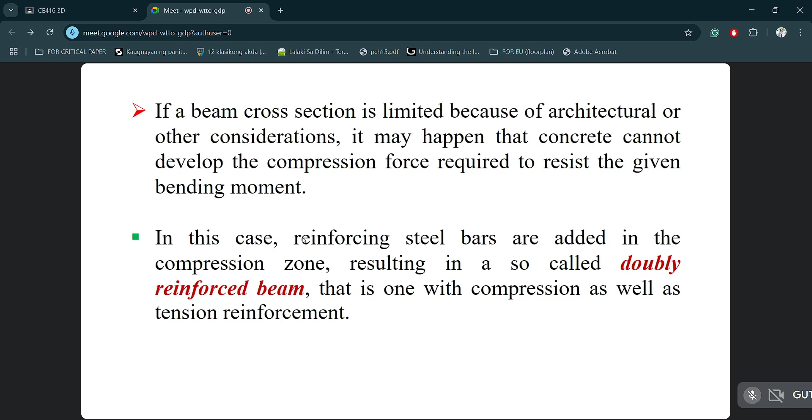The difference between the two is that when singly reinforced, we just consider the tensile reinforcement, while when doubly reinforced, since the compression developed along the beam is not enough to carry the capacity, we add additional reinforcement along the compression side. So now there are two reinforcements to consider: the compression side and the tensile reinforcement.

Another reason for placing reinforcement in the compression zone is that when a beam spans more than two supports in continuous construction, both positive and negative moments will exist as shown in the figure, meaning we still have to put additional reinforcement along the compression zone.

Take note, we have what we call reversal of force, or RF, which happens especially under certain conditions. Reversal of force means...

this shear moment diagram can be reversed, meaning it flips, especially if we have a lateral force that hits our structural elements, induced by seismic force or wind load.

If we consider only the dead load and live load, the shear moment diagram of our beam is mostly based on our structural theory analysis. But if there is a lateral force involved, there is a tendency for reversal of force, wherein the positive moment becomes negative, and the negative becomes positive.

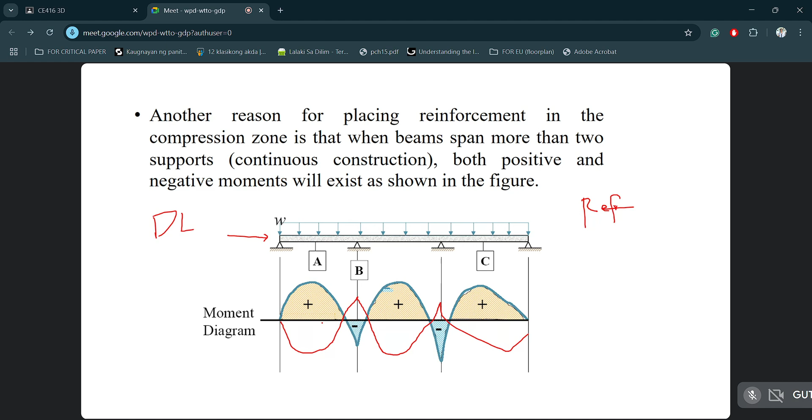It has been found that the inclusion of some compression steel has the following advantages. Number one, it will reduce the long-term deflection of the members since we have additional reinforcement along our section, strengthening the beam.

It strengthens our beams and helps reduce deflection. It will also set a minimum limit on bending loading, and acts as a support for stirrup bars continuing throughout the beam span. This means our compression reinforcement is actually necessary even if the beam is singly reinforced for moment, we still need to put compression reinforcement.

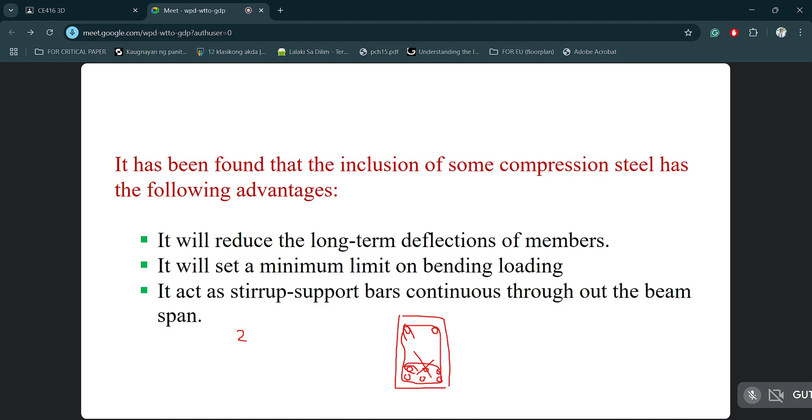So the stirrups should really enclose the compression reinforcement as well, which has a minimum of 2 pieces. In the analysis, the total resisting moment of the beam is assumed to consist of two parts, or two internal couples.

The first couple is the part due to the resistance of the compressive concrete and the tensile steel reinforcement, which is defined by the singly reinforced concept. In our singly reinforced concept, we just consider the tensile strength provided by our tensile reinforcement, denoted by T, and the compression force, which is the equivalent compression block of our beam, defined by C, equal to 0.85 f'c times A times B.

When it becomes doubly reinforced, we have an additional couple moment, which is the part due to the compressive steel developed by the steel reinforcement along the compression zone, plus the additional tensile strength of the steel.

This is what happens when our beam is singly reinforced - the only consideration is the compressive force C provided by the concrete, and the tensile strength provided by our steel.

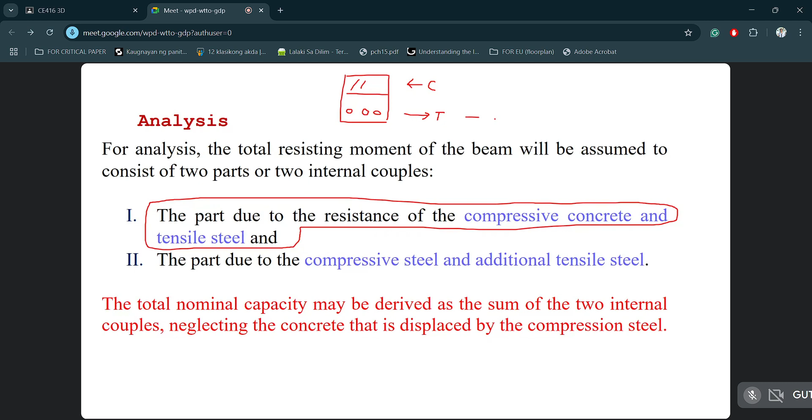When it's doubly reinforced, notice that the steel reinforcement along the tensile zone is increased. So we have additional tensile reinforcement, plus additional reinforcement along the compression zone, giving us an additional compression force provided by the steel reinforcement.

So now we have two couples which produce our moment capacity. The total nominal capacity may be derived as the sum of the two internal couples, neglecting the concrete that is displaced by the compression zone reinforcement.

Take note that for our compression zone, we consider it as a whole area - we are not going to consider the concrete displaced by our additional reinforcement along the compression zone. This is to make it simple, because the diameter of the compression reinforcement would depend on the necessary requirement, and considering the displaced concrete would complicate the analysis. So to simplify, we consider the whole section as the compression provided by the concrete, and we don't account for concrete displaced by the compression reinforcement.

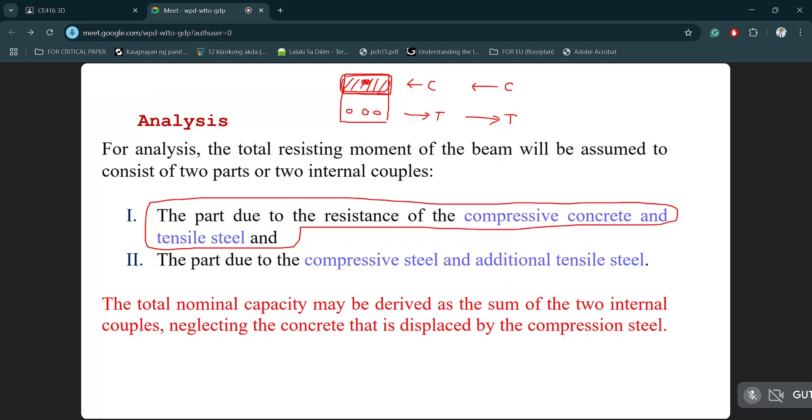In other words, if the compression reinforcement has more than 2 layers, then you need to first define the centroid of that particular reinforcement, just like what we did in our singly reinforced beams.

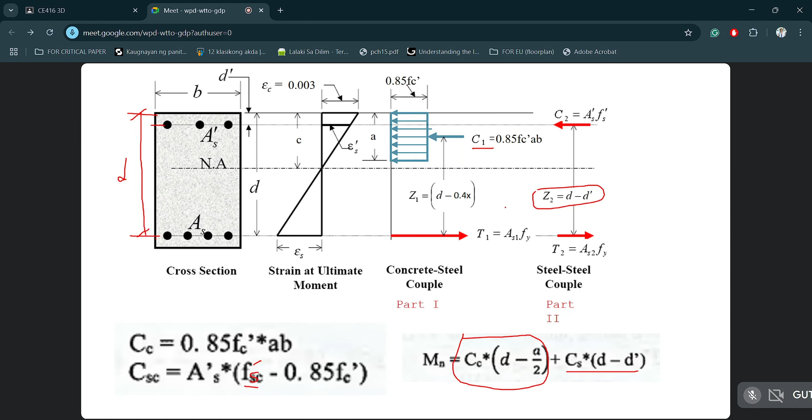So this is the additional moment arm of our additional compression force provided by the compression reinforcement. Meaning the analysis is the same: the strain diagram and the force diagram are the same, only that we need to add additional capacity in terms of the additional compression reinforcement.

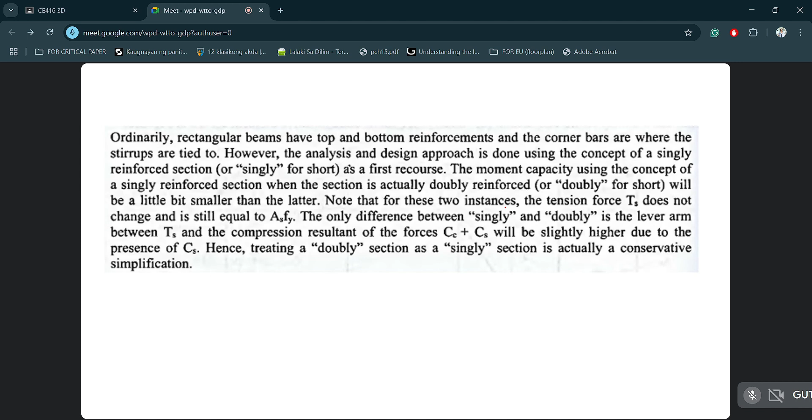Ordinarily, rectangular beams have top and bottom reinforcement, and the corner bars are where the stirrups are tied to. So if we have the beam here, this is the compression zone, and this is the tensile zone. So mostly our stirrups will be hooked along the corner reinforcement.

However, the analysis and design approach is done using the concept of a singly reinforced section as a first recourse. The moment capacity using the concept of a singly reinforced section, when the section is actually doubly reinforced, will be a little bit smaller than the latter. Note that for these two instances, the tension force does not change and is still equal to As Fy.

The only difference between the singly and doubly reinforced cases is the lever arm between the tension force and the compression resultant of the forces C sub C and C sub S, or C1 and C2. It will be slightly higher due to the presence of C sub S, the additional force from the additional compression reinforcement. So doubly reinforced beams will have a higher capacity compared to singly reinforced beams. Hence, treating a doubly reinforced section as a singly reinforced section is actually a conservative simplification.

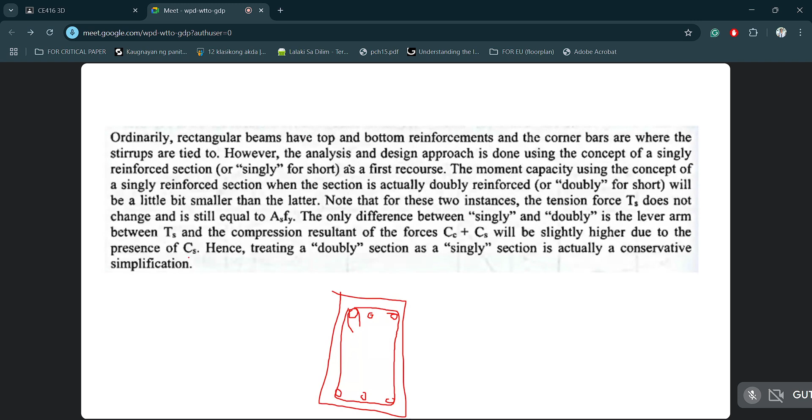So let's talk now about the maximum steel ratio. Take note, it hasn't changed, our maximum steel ratio in terms of singly reinforced beams, which is equal to 0.85 FC prime beta 1 over Fy, times 3/7.

This remains our basis if we are going to design our beam based on singly reinforced or doubly reinforced. If our steel ratio is greater than our rho max, we design it as a doubly reinforced beam. Even for doubly reinforced beams, the same rho max is still used as the basis of our analysis. But the actual maximum steel ratio of a doubly reinforced beam will change because we have additional reinforcement in the compression zone. Still, we use this as the basis for analyzing either singly or doubly reinforced beams.

We recall that to ensure the beam sections will be ductile, the minimum steel strain as per NSCP is 0.004. This is our general provision, that the strain of our steel should be 0.004 to ensure that our section is a tension-controlled section and behaves as a ductile structure.

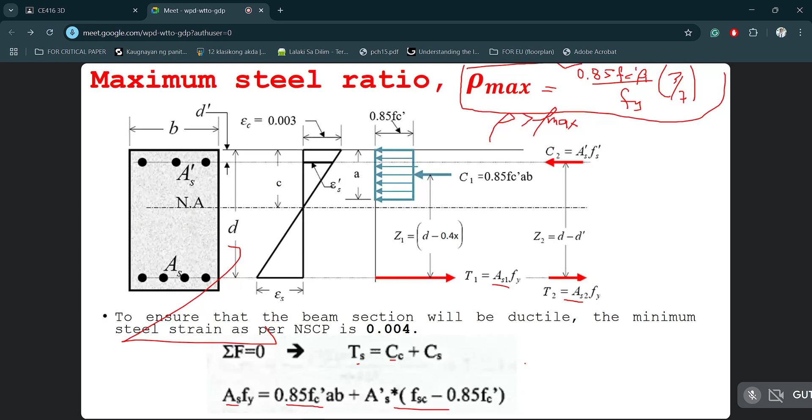This is the compression force provided by the concrete, and this is the compression force provided by our steel reinforcement. If we divide by BD Fy, the first term's Fy cancels out, leaving As over BD.

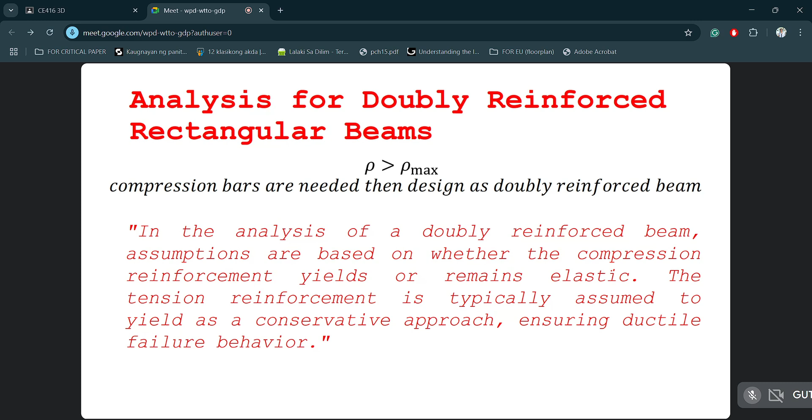Okay, now what formula do we need? If you consider the strain diagram of the beam, we have this relationship - the actual strain of our compression reinforcement, we can derive it based on this particular figure.

So this figure, this part here marked in red - if we take the ratio or the slope of this, that becomes our slope here. This part or this distance is 0.003, minus the strain of our compression reinforcement.

The depth of this is d prime, or the steel covering plus the distance from the top fiber to the centroid of our steel reinforcement - that is d prime. This is also equal to the larger triangle here, which is 0.003 over c. So if we rearrange, with c and d, this is what the scenario becomes.

And then we recall that strain is simply equal to stress over the Young's modulus of elasticity. So this is it. And then if we substitute the value of the Young's modulus of elasticity, we're missing a 0. Wait for a while.

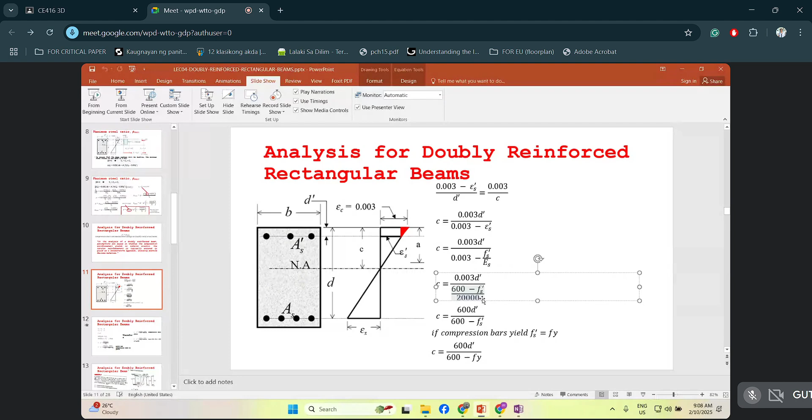Let me correct this one first. Okay, so what happens - multiply this, going to the numerator. So 200,000 times 0.003, that is 600 d prime, all over 600 minus Fs prime.

Now if the compression bars are yielding, the depth of the neutral axis becomes simply 600 d prime over 600 minus Fy. But if not, then we need to solve for the actual strength or stress of our compression bars, or our Fs prime.

And then our As1, the total reinforcement, is simply As minus As prime. And then the steel ratio of the tensile reinforcement will be the actual steel ratio minus the steel ratio of our compression reinforcement. And then if you consider the section as singly reinforced...

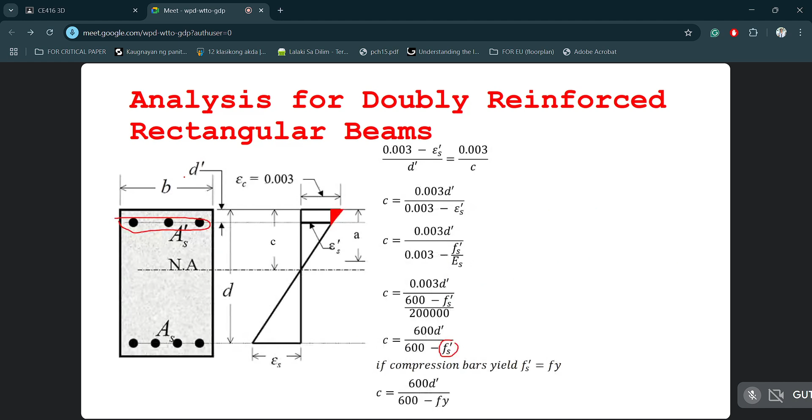So like this - this part here, we are going to omit for now. Omit our compression reinforcement and analyze it as singly reinforced. So if it's singly reinforced, the area of steel reinforcement we use will be the total area of steel reinforcement minus the area of our compression reinforcement.

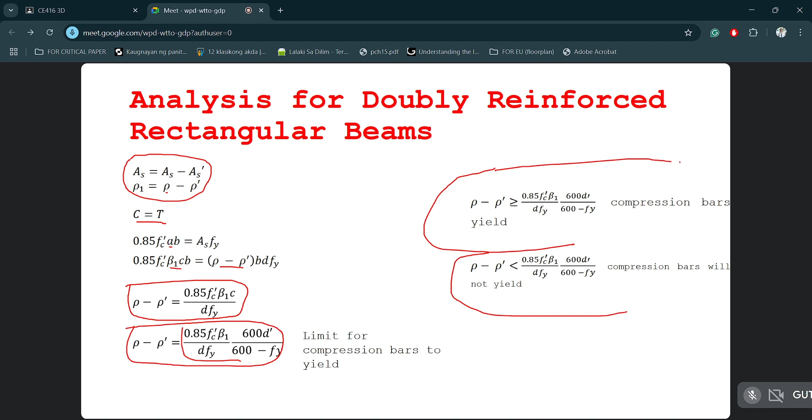So in other words, ito na lang, no? Ito yung maging shortcut na formula to determine whether compression bars is yielding or not. Okay?

Okay, so therefore, if you are going to use it in our sample problem, so this is our problem, no? Ayan, so let's have our first problem. Let me adjust this one first.

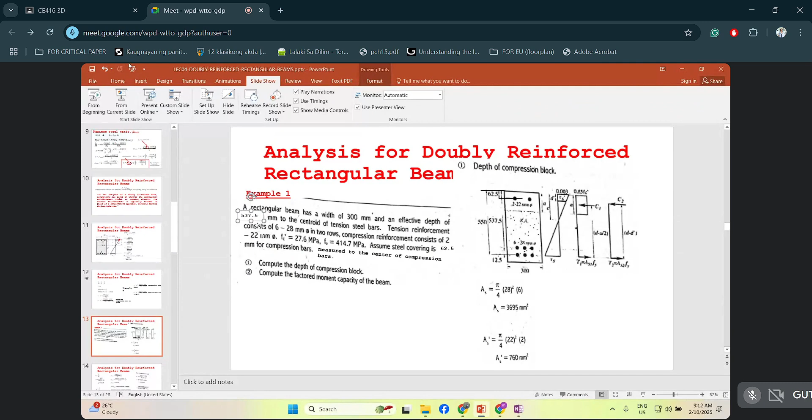Okay, so you'll notice yung ating given question, this is actually extracted from our textbook, pero ako lang ang nag-change gamay then i-clarify ko ang uban kasi yung textbook na to is based on the 2010 na provision ng NSCP, so ako siyang gi-revise to apply the latest version ng code.

So a rectangular beam has a width of 300 mm and an effective depth of 537.5 mm measured to the centroid of the steel reinforcement. So meaning itong effective depth na to is already measured doon sa ating centroid ng ating tensile reinforcement. So the tension reinforcement consists of 6 pieces 28 mm in two rows.

And then the compression reinforcement naman consists of 2 pieces 22 mm diameter bars wherein our compressive strength of the concrete is 27.6. This is less than 28, so meaning yung beta 1 natin dito is magiging 0.85.

Yung Fy naman, yung yield strength ng steel natin is 414.7, and we assume that the steel covering is 62.5. Take note yung steel covering na to is already measured to the center of the compression bars, so meaning ito na yung gagamitin natin as D prime.

And then same pa rin yung magiging concept kapag yung ibibigay sa inyo is clear cover lang ng ating concrete, kasi yung covering natin ng ating beam, yung steel cover ng beam natin is all throughout yan doon sa 4 sections ng beam natin. So meaning kung ano yung steel covering ng tensile reinforcement, same lang din yung magiging steel covering niya for the compression reinforcement. So meaning kapag ibibigay sa iyo is cover lang, same pa din yung magiging D prime mo.

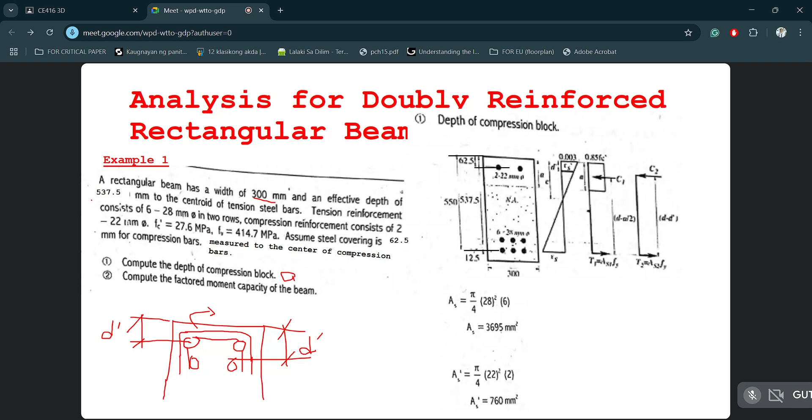So meaning if we are going to define what is the steel ratio, so the steel ratio provided by the steel reinforcement, that will be As 3,695 divided by our B times the effective depth, or 300 yung given natin na width ng beam natin, tsaka yung effective depth naman is 537.5. Kaya meron tayong steel ratio na 0.02

Now, yung steel ratio naman provided ng ating compression reinforcement, same pa rin, no? As over bd pa rin siya. Pero this time, yung ES natin is yung ES prime or yung steel area provided by our compression reinforcement. So, we will have here 0.00471.

So, kapag kukunin natin yung maximum steel ratio based on a single reinforcement na concept, same yung formula, no? 0.85 FC prime beta 1 over Fy 3 over 7, magkakaroon tayo ng maximum steel ratio na 0.0206. Wherein yung provided na steel ratio ng tensile reinforcement natin is greater dun sa ating maximum steel ratio. So that means, no, kapag maximum yung or kapag more than yung ating actual tensile steel ratio ng tensile reinforcement, then we need compression bars.

So that means we are going to design it based on a double reinforced design concept. Alam natin, no, na kapag double reinforced yung ating beam, ito yung maging criteria na kung nag-yield ba yung compression or not.

By the way, no, kapag yung ating actual steel ratio is lesser than sa rho max, then yung procedure na to will become invalid kasi yung mangyari, i-design mo to based on a single reinforced concept. No? But in this case, more than yung ating steel ratio sa maximum, then i-design natin siya as a double reinforced beam. So yung first step natin sa ating pag-design is we need to satisfy this criteria.

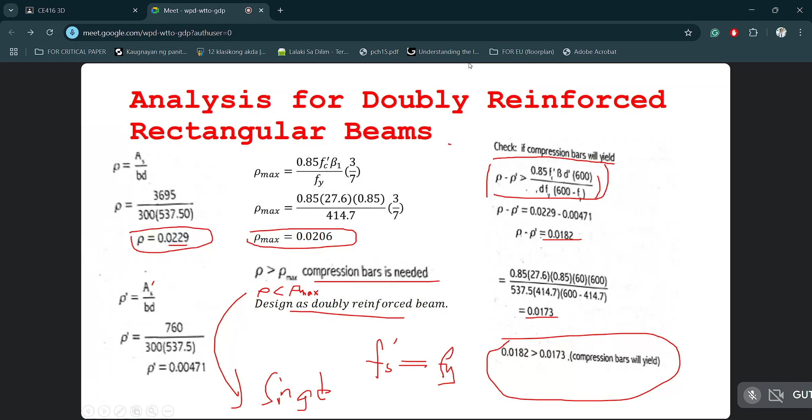By the way, no, you don't need to check whether the compression bars is yield or not, no? Kasi na-check na naman natin based on this particular analysis, no? So in other words, na-satisfy itong, na-satisfy itong equation na to.

Ayan, itong part na to. So we don't need to check, no? Or we don't need to additionally check, no, our if nag-yield ba talaga yung ating compression reinforcement.

But you will notice here na sinolve pa rin natin yung ating depth ng neutral axis natin to simply solve doon sa ating actual na strain ng ating tensile reinforcement, because yung actual strain ng ating tensile reinforcement na to will define what would be the value of our reduction factor. And in this case, yung actual strain is 0.00514, which is greater than 0.005. That means yung reduction factor natin dito will be equal to 0.9.

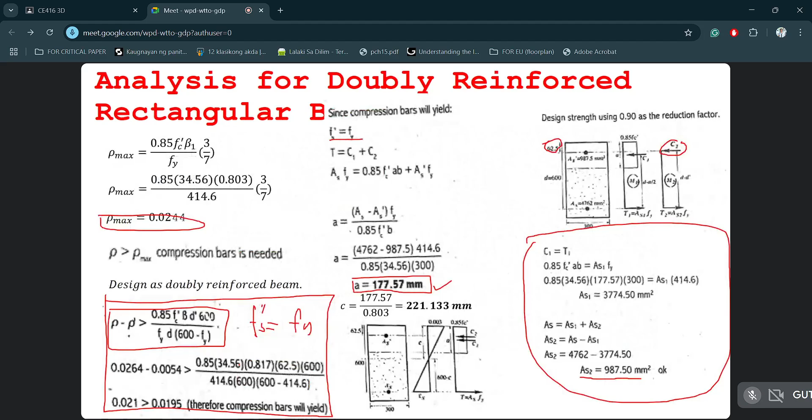Now, yung next requirement is ano yung allowable na concentrated load natin at midspan ng ating beam. So, gagawin lang natin is using the load factor, na 1.2 dead load plus 1.6 live load.

So, instead of adding our load, ang gagamitin natin dito is yung moment, kasi hindi naman natin ma-add yung concentrated load na live load tsaka uniform load na live load. Kaya ang gagawin natin is kukunin natin yung moment ng dead load tsaka moment ng live load para pwede natin i-combine yung dalawa.

Yung maximum moment provided by ating live load, concentrated ito at the midspan, that is PL over 4 or the force times the length over 4. Yung ating uniform load naman na dead load, yung maximum moment na to is WL squared over 8. So ito yung dead load natin, uniform yung dead load, ito naman yung live load which is concentrated at midspan.

Then ito naman yung magiging factor niya, 1.2 sa dead load, 1.6 naman sa live load. So all in all, yung allowable force natin at midspan ng beam natin based on the live load is 337.5 kN. Okay, so ito yung magiging answer natin.

So any question so far?

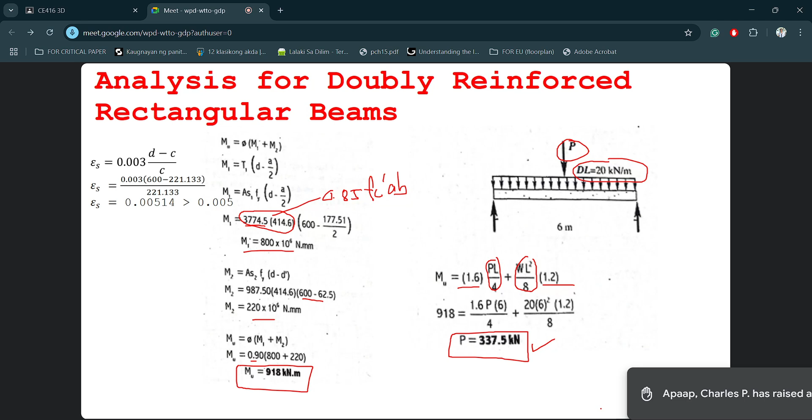Yes, go ahead. Dili na ako ni siya i-minimize kay di ako makita. Go ahead na lang dayon. If you have question.

Good morning, sir. Yes. Wala siya sa solution, sir, but napansin ako sa YouTube, sir, bagay, ay solution na part of solution na ang magamit nila sa pag-solve sa C bagay. Usually, di ba itong ginagamit is 3 over 7, but sa ay solution, sir, nga gagamit sila 3 over 8.

3 over 8? Okay. So yung 3 over 8, yun yung balance, no? Balance condition. So meaning na achieve niya, kumbaga na-achieve niya both the compression, yung compression strain tsaka yung tensile strain. But yung 3 over 8 na yan, yun yung condition wherein parang ganito.

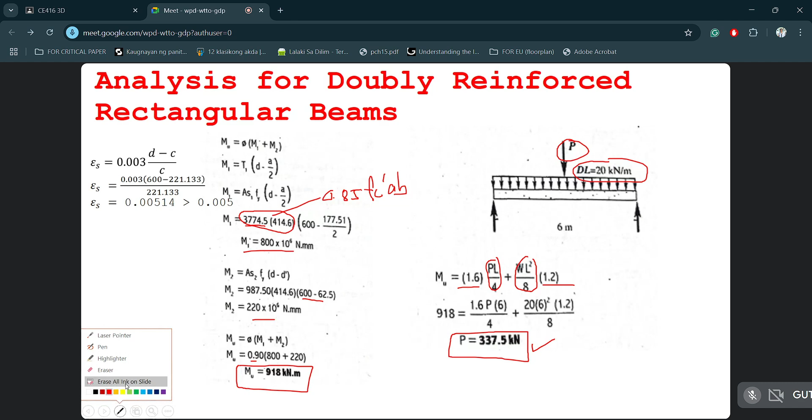Let me explain it in a separate slide. Dito tayo. Okay, 'di ba kung mag-solve ka og actual strain or yung maximum steel ratio, diba? Maximum steel ratio, yung we are talking about maximum steel ratio.

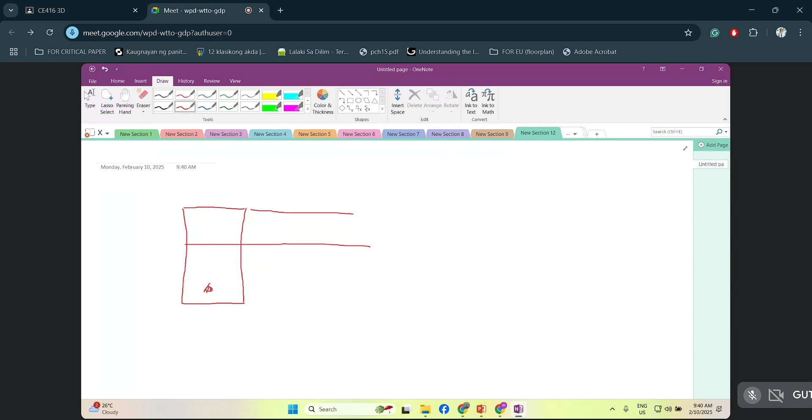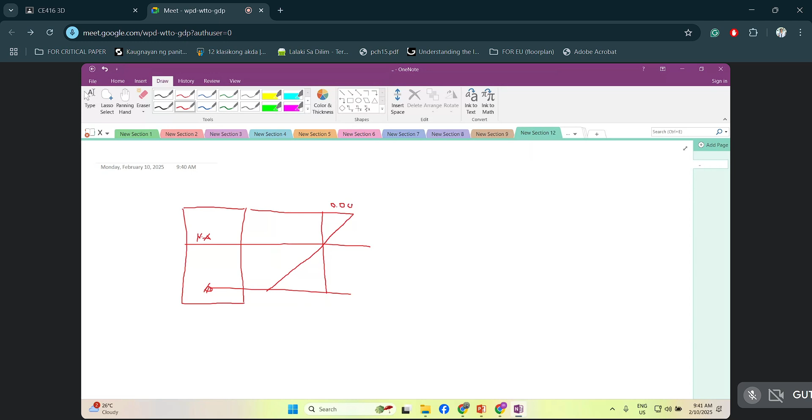So, kung i-draw natin yung ating strain diagram, ito yung neutral axis. And let me put here A, wherein this is the neutral axis. Alright, so mangyari, this is the strain for the concrete, nakuha mo kayo. But anyway, this is the strain of the concrete na meron tayong maximum na 0.003. Ito naman, ito yung actual strain ng ating steel.

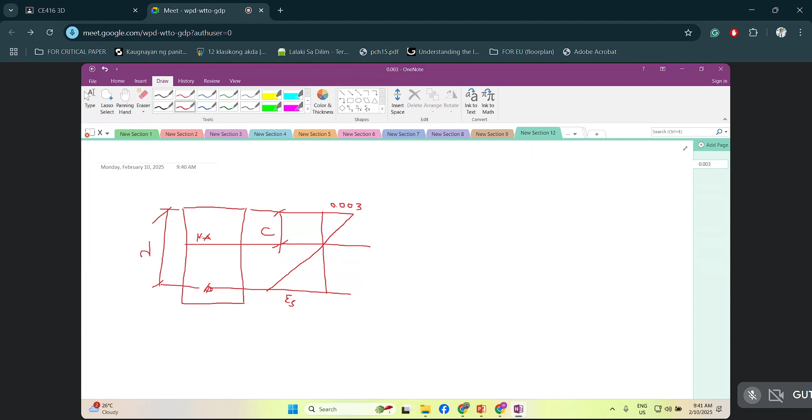No, this is C. Okay, if this is effective depth, right? Kung effective depth to, ang maiiwan dito will be D minus C. Ayan, right? So, kung i-ratio natin to, ang mangyari, that is C.

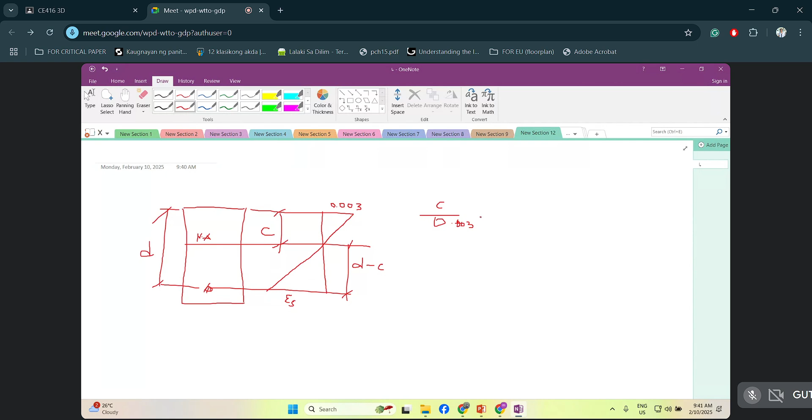Although na-discuss naman ito, pero ato lang i-recall balik, para ato ma-explain further. Or let me put it here siguro. Ito sa boss, C, using this triangle, that is 0.003.

Ito naman is maging ES over, mali, D minus C over ES. Okay, ayan. So, meaning, mangyari, yung C natin is simply, alright, yung C natin magiging 0.003, D minus C over, excuse me for a while.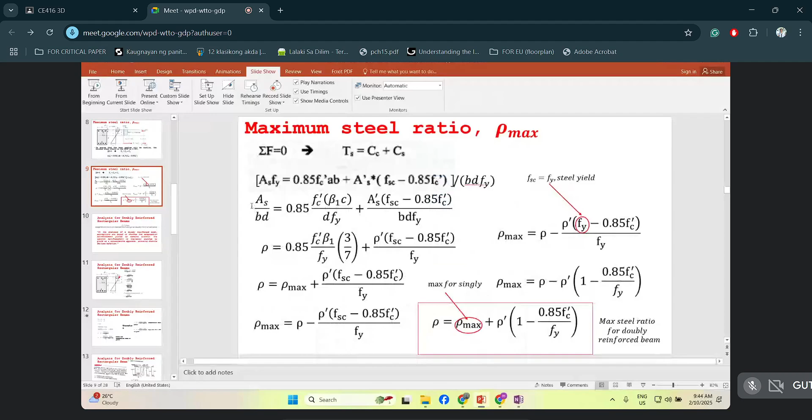To ensure that the beam section will be ductile, the minimum steel strain should be 0.004. So meaning, for it to become ductile or tension controlled, the ES should be 0.004, making it 0.004 plus 0.003. The C over D ratio is 3 over 7.

Okay, got it? That's 3 over 7. Understood? That is 0.003 all over 0.004 plus 0.003, so 3 over 7. Right? Got it? Yes, sir.

Now if we go back to the reduction factor, we are going to use 0.9 when our actual strain is 0.005. So meaning, the code says our minimum or maximum strain should be 0.004 for it to become ductile or tension controlled.

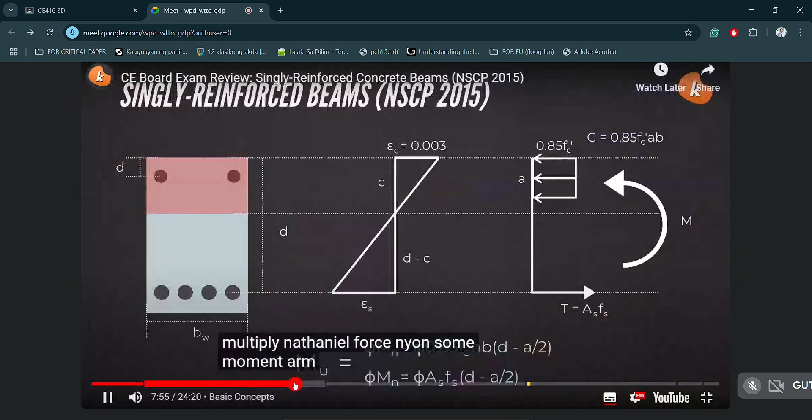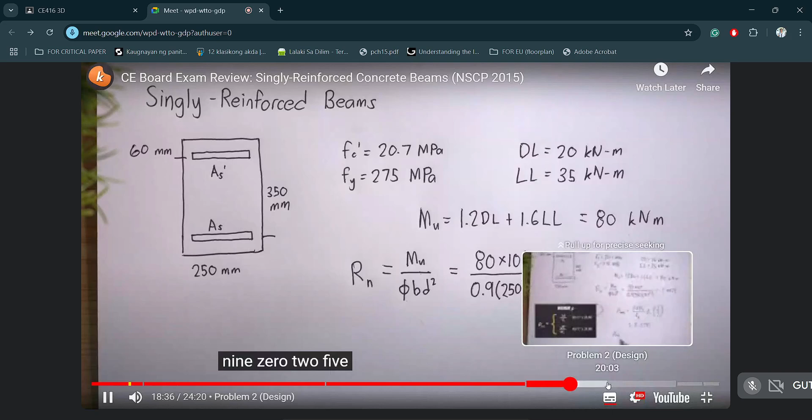This one here is 3 over 7. Over here, I don't think so, but I think I have also seen this one.

I think I've also seen that particular YouTube channel use 3 over 8. But I think there is something in the problem statement saying the solution should be tension controlled, meaning it should be based on the actual strain of 0.005. That's why in that case, the C over D ratio became 3 over 8.

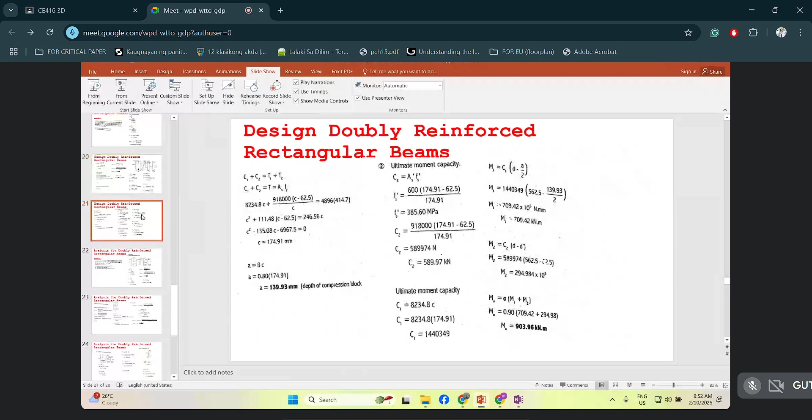A reinforced concrete beam has a width of 350 mm and an effective depth of 562.5 mm. It is reinforced with bottom section steel of 4,896 mm2, which is for the tensile reinforcement. The compression reinforcement, placed 62.5 mm below the extreme compression fibers, has an area of 1,530 mm2. Given f'c equal to 34.6 MPa and fy equal to 414.7 MPa, determine the depth of the compression block and the ultimate moment capacity.

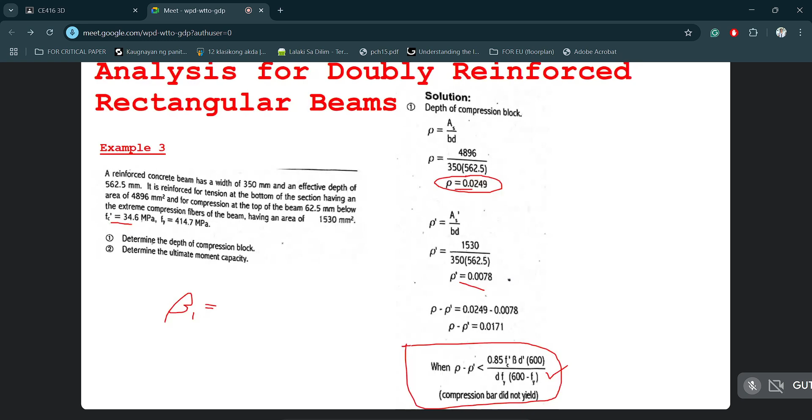So we solved for beta 1 and we already checked that it's not yielding. Using this situation, 0.8 is our beta 1 using the formula, substituting it to our term: 0.85 Fc prime, beta 1, D prime, 600 D minus Fy, 600 minus Fy. You'll notice the answer here is 0.0204. The steel ratio minus steel ratio prime result is only 0.0171, which is lesser than 0.0204. So this means our compression bars do not yield.

So what happens when our compression bars do not yield? This means Fs prime is not equal to Fy. We need to solve for the actual value of Fs prime. It's the same as in singly reinforced beams. We need to combine our strain formula with the force diagram.

We need to solve for the actual strain using ratio and proportion. So Es prime over C minus D prime, this depth, which is the depth of our neutral axis minus D prime, is simply equal to 0.003 over C. So our Es prime will be 0.003 times C minus D prime over C. And we know that Fs prime is simply the strain times the modulus of elasticity, so we get the actual steel strength as 600 times C minus D prime over C, which is...

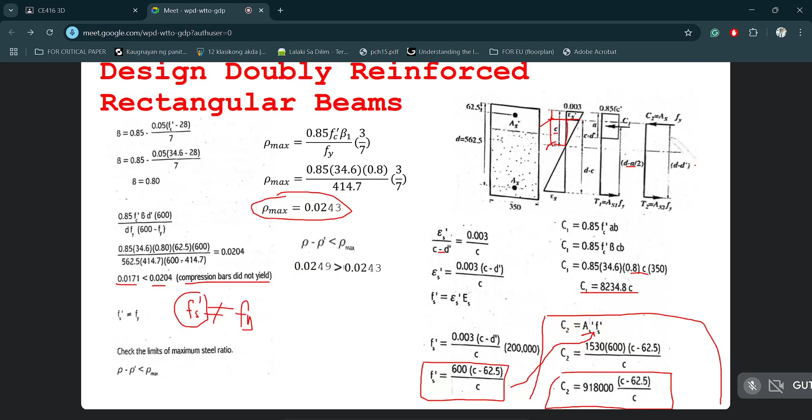And for C1, we already solved it as 8,234.8 times C, multiplying C, we get C1 as 1,440.349 kilonewton. So these two, we just rotate and multiply by our moment diagram, the moment arm of C1 and moment arm of C2. Wherein the moment arm of C1 is the original D minus A over 2, and for C2, the moment arm is D minus D prime.

Meron tayong M1, meron din tayong M2. Add lang natin itong dalawa and we apply the reduction factor na 0.9. Kaya meron tayong 903. Bakit 0.9 yung ating reduction factor?

Kasi yung 0.9 yung reduction factor natin, kasi if we are going to solve for the ES, ang mangyayari, yung ES natin dito is simply Fy, kasi nag-yield yung ating tension reinforcement. So Fy all over ES, this is automatically more than 0.005. So 0.9 yung magiging reduction factor natin dito.

We will have a ultimate moment capacity na 903.96. And so actually ito yung question kanina, kung 0.9 ba yun ang gagamitin permanente sa double reinforced rectangular beam. In most cases 0.9.

Pero meron kasing ibang mga problem na i-stipulate na yung tensile reinforcement does not yield. So mangyari, magsusolve ka talaga ng reduction factor mo. But in this case, hindi naman siya nag-stipulate. That is why conservatively, we assume that the tensile reinforcement is yielding, so mangyari yung ES, yung actual natin na strain ng tensile reinforcement is more than 0.005.

So ayan, yung ultimate moment capacity ng beam natin is 903.96 kilonewton meter. Okay, so I think this is the last problem. Let me check.

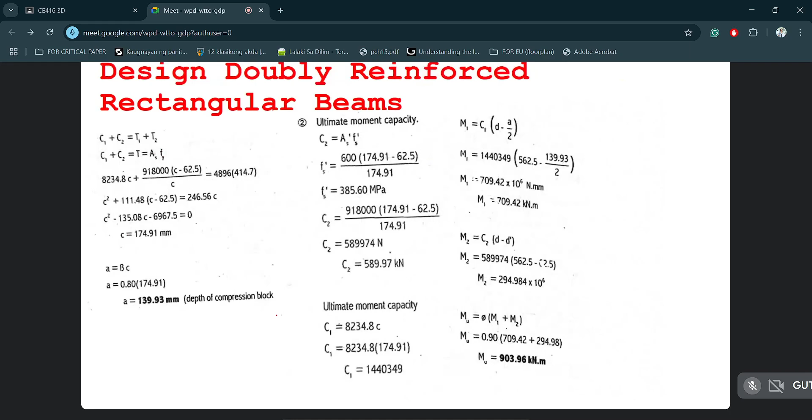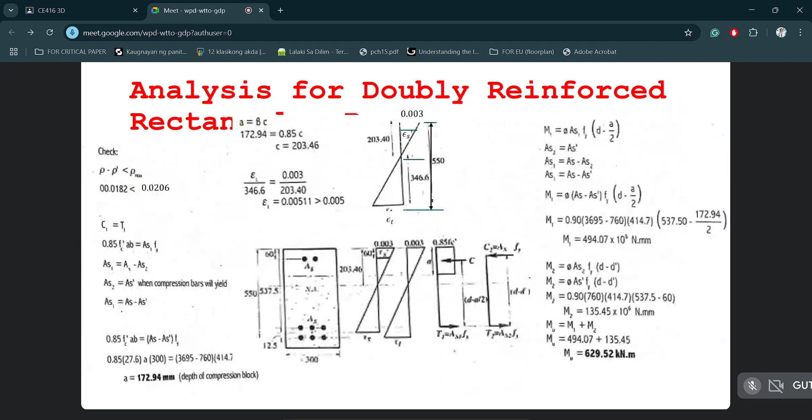Yung formula na gagamitin natin dito is yung kanina. Ayan, ito 'yon, itong formula na to, pero ito magiging Fs. Well, ito ha, ito, ayan, so. Sorry. Lapas. Sample, saan ba yan? Example 4.

Okay, so depth ng compression block. Same pa din yung procedure natin. In this case, yung beta 1 na gagamitin is 0.85, kasi yung FC prime is less than 28 megapascal. So we solve for the actual steel ratios.

By the way, itong maximum steel ratio na to, again, hindi to yung requirement ng ating number 2, kasi ito yung maximum steel ratio natin based on the singly reinforced concept. Itong required na to, this is actually after na-solve natin yung depth ng compression block. That means itong maximum steel ratio na to, ito yung maximum steel ratio natin na double reinforced na yung beam natin. Okay, so in that case, meron tayong maximum steel ratio based on singly reinforced na 0.0206.

So kung i-deduct natin yung steel ratio minus steel ratio prime, meron tayong 0.0182 lang, tsaka yung maximum steel ratio natin is 0.0206.

So that means we need the compression bars. So mag-add tayo ng compression bars, mag-i-doubly reinforce yung beam natin. So doubly reinforce yung beam natin, so we need again to satisfy this condition. If this is greater or equal to this term here, the compression bars will yield. Otherwise, the compression bars will not yield.

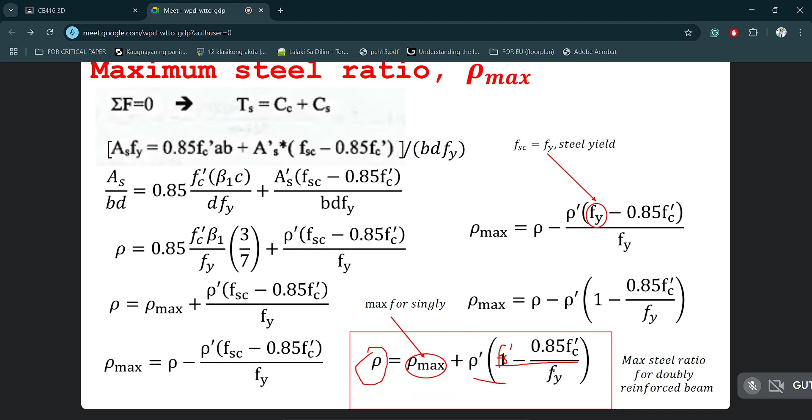So going back to the requirement for maximum steel ratio, here it is. Fs prime, we solve first using this equation. We solve for the actual Fs prime, that is 282.15, which is lesser than our Fs, lesser than our Fy. So Fs prime is actually not yielding. Substituting the values, we get 0.0213. This is our maximum steel ratio.

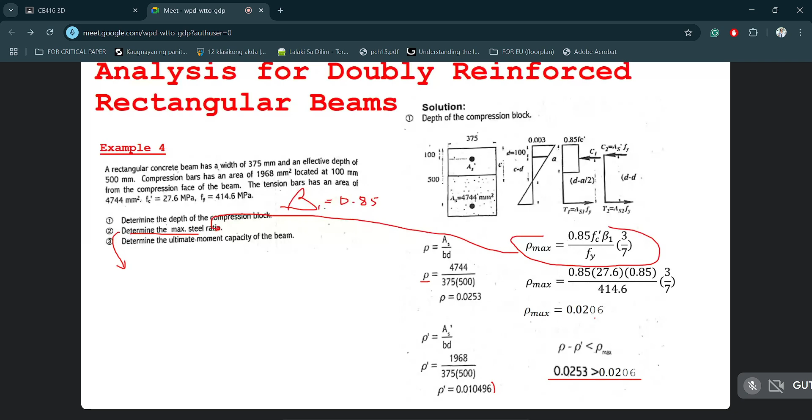Notice the maximum steel ratio is a little bit higher than the maximum steel ratio for singly reinforced. That was 0.0206 for singly reinforced, then for doubly reinforced that is 0.0213.

So for ultimate moment capacity, the procedure is the same. What is the moment provided by C1 and then the moment provided by C2. So we have an overall formula. For As1, you can use C1 here too, that's okay, we will come up with the same answer. And then here, you can also use C2 - actually this is just C2 anyway. So we will have a moment reduction factor.

If you notice here, we derive the actual strain, that is 0.005. And then we use 0.9 as our moment reduction factor. So we add the two moments together, and the ultimate moment capacity becomes 833.85.

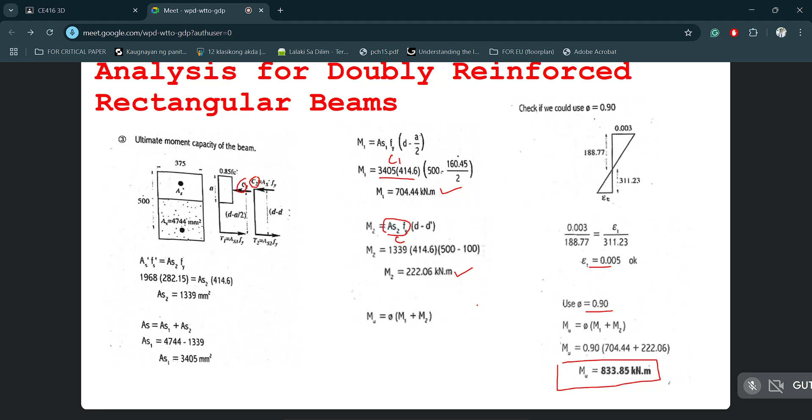So question number 5, this is actually coming from our textbook. The cantilever beam shown is to carry a load of P and W. P is concentrated at the end of our cantilever beam, and W is the weight over the entire span of the beam. The dead load P is 55, the live load is 34. The dead load of W is 19 including the beam weight, and the live load is 11.

So the prescribed size of the beam is given, wherein 300 is the width, 430 is our effective depth, and D prime is 70. The property of our concrete, FC prime is 25, which is lesser than 28, so beta 1 is 0.85. Our steel is grade 40, meaning our Fy is 276. By the way, for grade 40, we have 275 to 280 for the grade of our steel reinforcement, but in this case, the value used is 276. The span of our beam is 2.2.

So let's design the beam now. Here we have a step - you can either follow this one or the previous steps or procedures, either can be used. So beta 1 is 0.85. Maximum steel ratio based on singly reinforced, that is 0.028047. In this case, it's not yet checked whether this is the actual reinforcement, because the steel reinforcement isn't given yet.

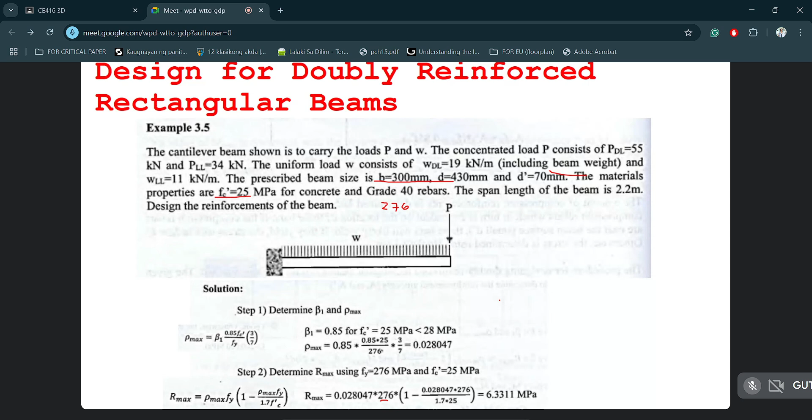Let's go back to our previous example. So step number 3, we solve for the maximum moment, that is - R is simply Mu over reduction factor, b, d squared.

So parang ito lang din yon. Yung Mu natin is simply reinforcement coefficient times reduction factor b d square. So that is 6.331, 300 times 430. Now, you will notice here, hindi sinali yung reduction factor dito. That means itong formula na to, this is nominal moment capacity. Ayan, nominal moment ito.

And then yung design moment naman natin, no? So sulubunan natin yung ating total na uniform load tsaka total na concentrated load. Cantilever yung beam natin dito. So yung maximum moment is at the support, wherein yung maximum moment natin is WL squared over 2 plus P times L, or yung moment provided by our concentrated load at the support. So we will have an actual moment na 362.65, which is greater than the maximum moment na 316.07.

So that means hindi kakayanin ng beam natin if i-design natin siya as singly reinforced. Kaya ang mangyari is i-double reinforce natin. So if you notice here, sinod natin yung maximum na steel ratio. Ito yung ilalagay natin doon sa ating tensile bars or tension reinforcement, para magiging more than or equal siya sa maximum steel reinforcement. Diba? Yung concept natin kapag more than yung ating steel ratio ng tensile reinforcement, mangyari is i-design natin siya as double reinforced beam.

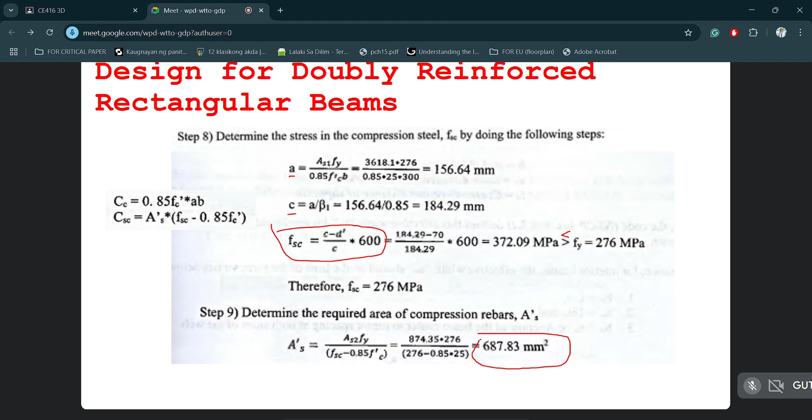Ayan. So determine the required area of the compression bars. Meron tayong formula, no? Yung AS prime na to, that is AS 2. Minus naman nung ating FS or yung actual strength ng ating steel, 276 minus 0.85 ng ating compression bars. Ito yung required na area. Pero take note, yung i-provide natin ay hindi yung required na area, kundi kung ano yung actual na dapat natin ilalagay dun sa ating compression bars to carry the given load.

Okay, so do you have question, guys, dun sa ating sample problems? Any question, clarification?